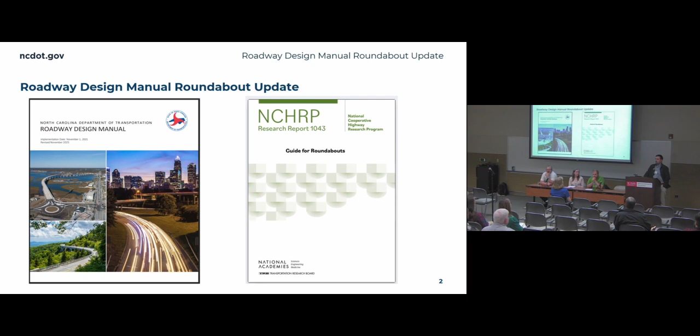So I'll give you guys a brief history of roundabout guidance in the state of North Carolina. It started out with NCHRP Report 672, which came out in 2010. We added a link to that, and that was essentially all of the roundabout guidance we did at that time. Then NCHRP Report 1043 came out in early 2023, and in November of 2023 we added a link to that, as well as a little bit of tailored guidance for North Carolina. That brings us to February of this year, where we have created our roundabout update.

The reason for this update is because we have had enough roundabouts in the state that we've faced a couple of reoccurring challenges. So we've taken some lessons learned from those projects, as well as national guidance and guidance from some other states, Florida being one of them. We've compiled all of that information into this update. So what was actually added?

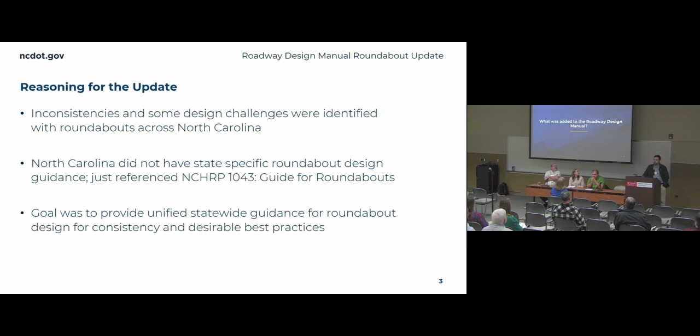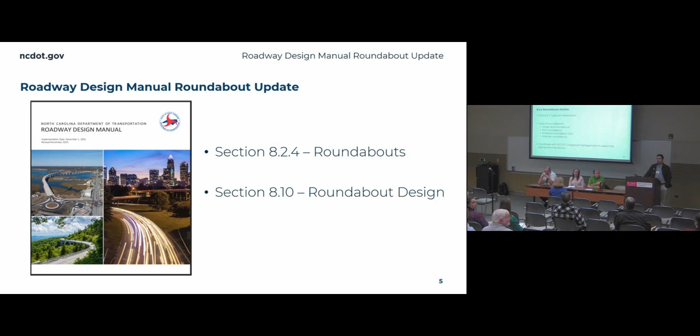We've added to 2 sections. The first section is an overview of roundabouts, and the second section gets into the design of roundabouts. For the first section, our overview, that is in 8.2, the types of intersections, and there are going to be 4 types of roundabouts that we discuss in that section.

The first one is single-lane roundabouts - that is the default roundabout you should consider. We then have mini roundabouts. A mini roundabout is a little bit smaller, and they're generally an upgrade from a 4-way stop. And then we have multi-lane roundabouts.

NCDOT is recommending 2x1 for our multi-lane roundabouts. You can do a 2x2 if you talk to congestion management, but we are highly discouraging it due to some of the issues we have had with them in the past. Finally, we have modular roundabouts. Modular roundabouts are quick and easy to put up, and very cheap. However, we have some concerns with the length of time that they will function.

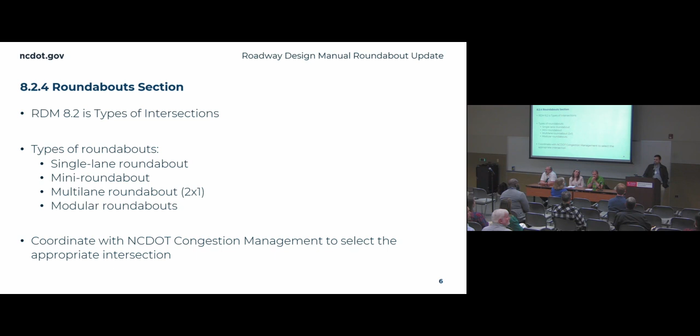So to get into 8.10, that is our design guidance. This section is going to be orienting designers. It is not going to be a one-stop shop. You are still going to use the NCHRP report, but this is going to give you an understanding of what we are looking for in North Carolina.

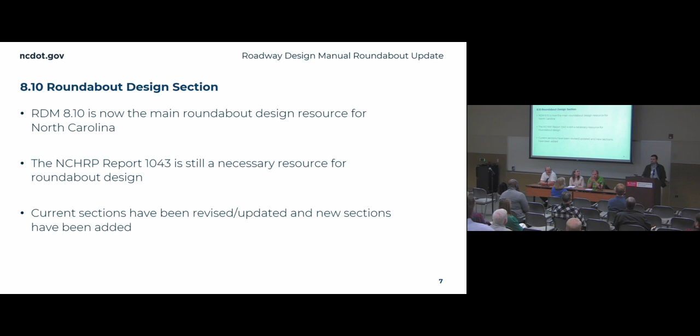The main thing it talks about is the roundabout design process. Roundabouts are very versatile, so you as a designer need to keep your objective for this location in mind. Some objectives listed here are speed control, pedestrian and bicycle accommodations, large design vehicles, high capacity, and right-of-way impacts. Think about your project location, your scope, your stakeholders, and what is important in that location. Pick the most important thing, and when you are designing your roundabout, keep that in mind.

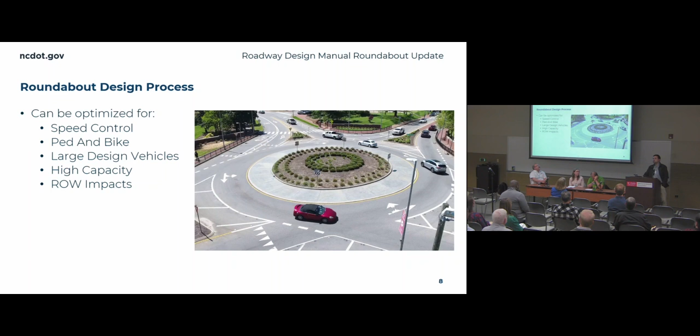Roundabouts can be optimized, but generally when you make a change, it will give you pros on one side and losses on the other. We want to make sure that we are considering our objective when we are weighing those two.

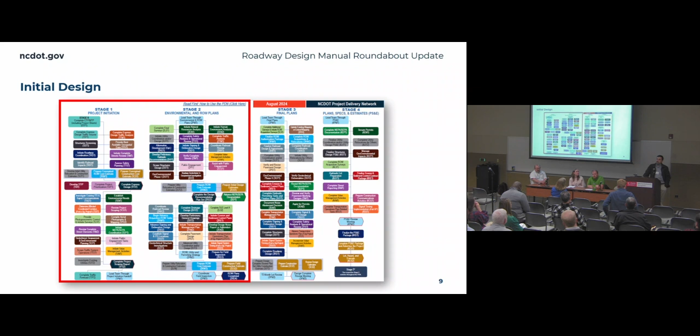During initial design, you need to consider six things. The first thing to consider is your alignments. You need to create horizontal and vertical alignments, as well as set the size and location of your roundabout circle. The location of your roundabout circle is something we want to emphasize.

This is something you should be intentional with. A lot of designers will put the center of their circle at the crossroads of their alignments, and we want to emphasize that if you move the location of that roundabout, you can get gains on some of your approach angles. Speaking of approach angles, for leg design, you have approach legs and departure legs.

For approach legs, our focus is slowing people down to the operating speed of the roundabout. As you can see here on that right side leg, that shows slowly decreasing radius curves. Then for the design of departure legs, we want to make sure that we are allowing people to accelerate out of our roundabouts.

Another thing that goes hand in hand with those two things is truck aprons. We're talking about external truck aprons here, and essentially we want to limit them for two reasons. The first is a pedestrian issue, which we will talk about later in the presentation, but they are also a large chunk of the cost for roundabouts. The final layout thing you will think about here is your bypass lanes.

Once you have your entire layout done, we can look at our fastest path calculations. For anybody who doesn't know what a fastest path calculation is, it is essentially the theoretical speed that you could travel through the roundabout. We want to make sure that all of these paths are similar in speed, but that's something Lily will get into a little bit more later on in the presentation.

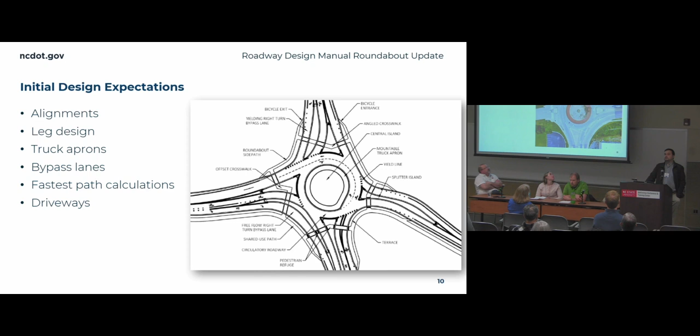The second and final stage we talk about is DRPS. If you look at this section, there are a lot of bullet points, and what you will see is a lot of things that say revise, confirm, and review. Essentially, this stage is iterating through previous designs.

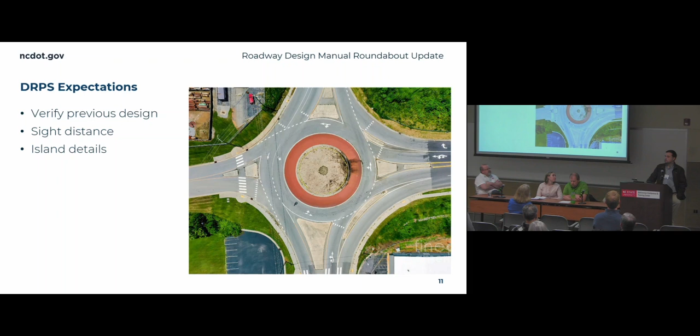Nobody's going to get a roundabout perfect on their first try. We want to emphasize that. You are going to have to make a lot of changes, a lot of adjustments, look at previous things, see what you can do, what changes can be made to improve your roundabout. There are two other things we're going to add at this stage: sight distance calculations, for both intersection and stopping sight, and island details.

So now we're going to talk a little bit about the typical section changes we have made. The thing I want to be very clear about on this slide is that this is a typical section, not a standard. We do not want to see 12, 18, and 10 used for all roundabouts. This is us sharing a starting point, but you should always get guidance and backup for the numbers you use on your projects.

The things I want to highlight here are changes to the truck apron, which is A1, changes to rolled curb, which is R2, and then changes to our pavement schedule, as well as changes to R3, which is our modified 2'6" curb and gutter.

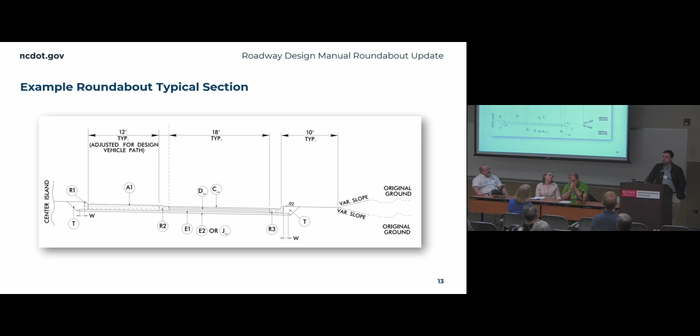2'6" curb and gutter is the standard for roundabouts. We want to recommend it on all of them. We believe curb and gutter has inherent speed control compared to shoulder and pavement markings—essentially, that vertical face of the curb is a much better enforcer than a line is. You do not, however, have to run curb and gutter over your entire project; it can be limited to the roundabout.

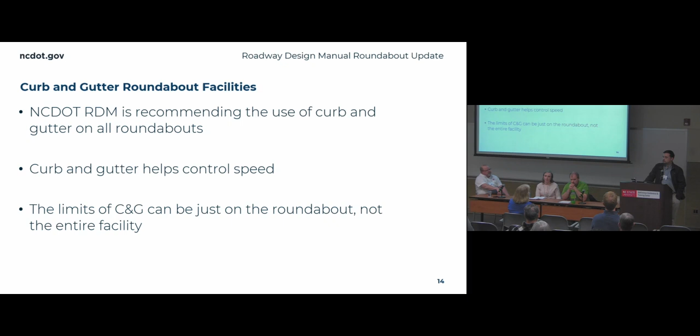The first typical section change we're going to talk about is the thickness of concrete truck aprons. That has been in the past anywhere from 7 to 12 inches, and we're using 12 inches as a standard moving forward. There have been issues with cracking of previous truck aprons, so we have increased that depth.

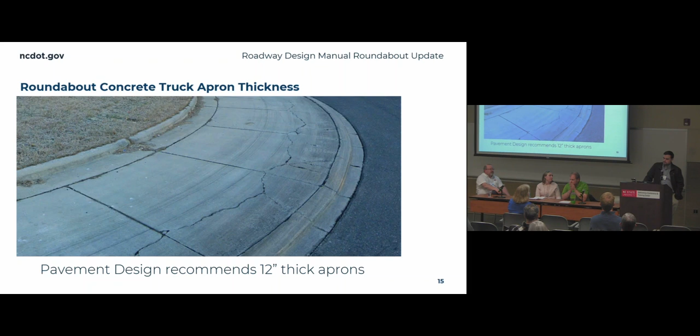The next change we have is rolled curb. Rolled curb is replacing 1'6" curb. That has sometimes been used on roundabouts, but we want to promote the use of rolled curb. Here we have two rolled curb standards: a 3-inch rolled curb and a 2-inch rolled curb. The 3-inch is standard, and the 2-inch is used whenever you have a high volume of low boys.

The benefits of this rolled curb is it provides a better, smoother transition from the circulatory roadway to the truck apron.

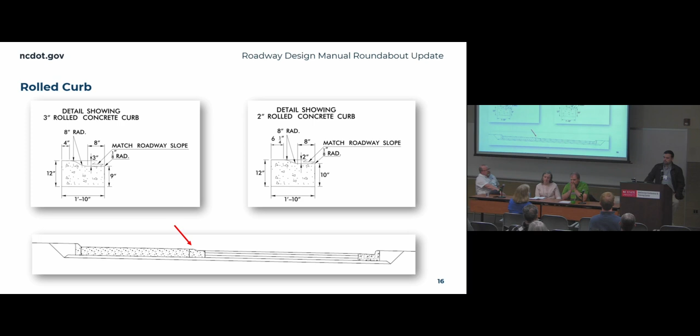Now, as you may have noticed, the faces of those rolled curbs were 9 inches and 10 inches, which is higher than the standard 7-inch face of our curbs, so we've had to make changes to our pavement schedules. The first change is those first layers, the orange, yellow, and red—3 layers of surface, intermediate, and then base, 3 inches each to sum up to 9 inches. That matches up to the face of those two curbs.

The other change we have made is that layer of base course on the bottom. The way this typical section is set up is that there's a continuous subgrade line under the entire section to make paving and grading easier.

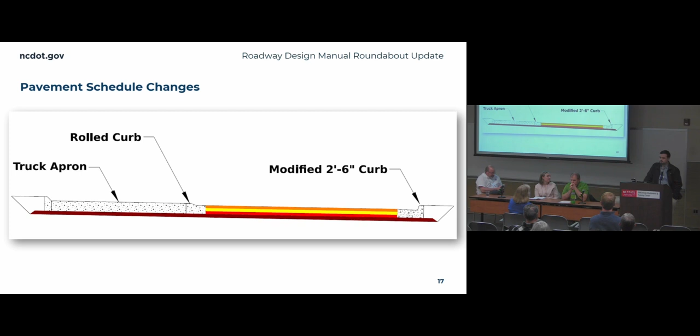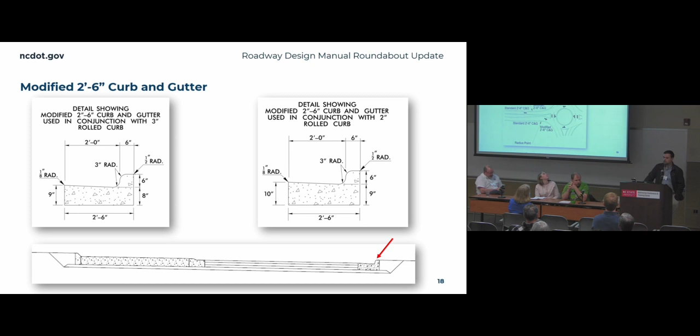So we don't want to see people running these over the entire length of a long corridor. You should limit these to just the roundabout—when I say these, I'm talking about the modified curbs as well as the pavement schedule. As far as where you make that transition, that's something you'll need to coordinate with the division and construction on, and a good time to do that is your field inspection meetings.

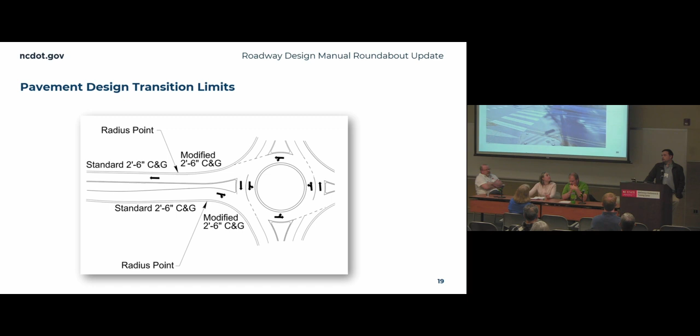The final typical section thing I will talk to you guys about is truck aprons. As I talked about previously, there are pedestrian issues here. The problem is a pedestrian waiting on the sidewalk doesn't understand that a truck apron is not a sidewalk. So if a person is waiting in that truck apron and a truck needs to use it, you have a conflict there. The easiest way to limit this conflict is to limit truck aprons as much as we can.

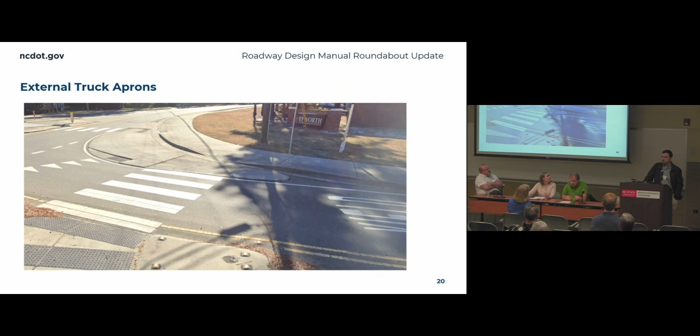What we've learned through developing this guidance is that designing a roundabout is a bit of an art. You're constantly trying to balance the core design principles: controlling speed, guiding vehicles clearly, promoting visibility, and accommodating large vehicles, then bringing all those elements together into one design that works well as a whole. For example, if you increase your entry radii, it may help truck turning movements, but it may also increase entering vehicles' operating speeds, which is less favorable for pedestrians. So you really have to consider the trade-offs of these design decisions.

We added some new subsections to the roadway design manual to help designers better understand these fundamental design principles. Those subsections cover the location and shape of a roundabout, vehicle capacity and lanes, speed control, speed consistency and fastest paths, entry angles and vehicle path alignment, and sight distance.

The designing for large vehicles section was given an overhaul. Some information that we felt was best covered by the NCHRP 1043 report was removed, and we added additional information regarding truck aprons based on feedback from pavement design and the divisions. There's also additional design guidance added on truck-heavy roundabouts.

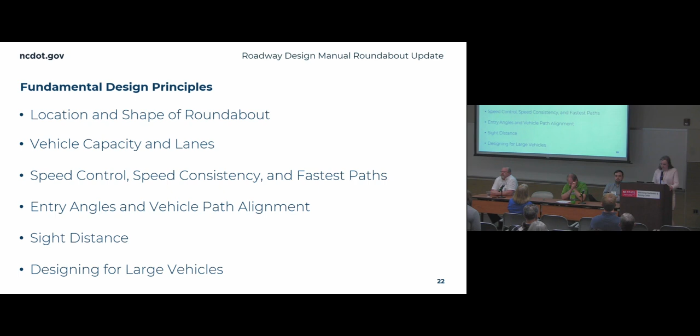When you begin the design of your roundabout, your first instinct can be to leave the circle right where the existing intersection is, as you can see on the left, to avoid property impacts, but that is not always the best option. In some cases, shifting that circle, like on the right, can help improve poor approach angles and ultimately improve how that intersection works.

Ideally, you want those legs to intersect the circle at as close to a perpendicular angle as possible. You can see here that the one shifted to the right does meet that better perpendicular angle. It usually takes some tweaking and iteration to get to the right circle location, but it really impacts the design, so it should be highly considered.

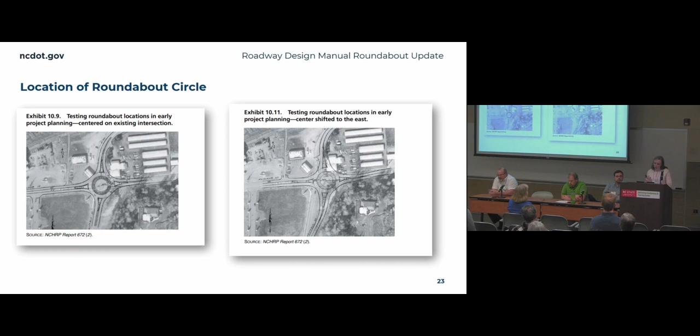For roundabouts on higher speed facilities, you want to slow that driver down before they actually get into the roundabout so they're able to go those slower intended speeds, 15 to 25 miles per hour, that a roundabout is intended for.

Unfortunately, posted speed reductions are not effective. Your geometry must provide that speed control. If a driver feels they are able to go higher than your desired speed, they will do it. That's why we added this figure to our guidance, based on examples from Wisconsin and Florida, as well as the AASHTO Method 2 super elevation tables.

Something else to keep in mind while discussing approach design is to ensure your splitter islands are not too long and too wide. They need to provide that speed control and accommodate pedestrians. However, minimizing them can help reduce your cost and footprint. So it's definitely another very important design consideration.

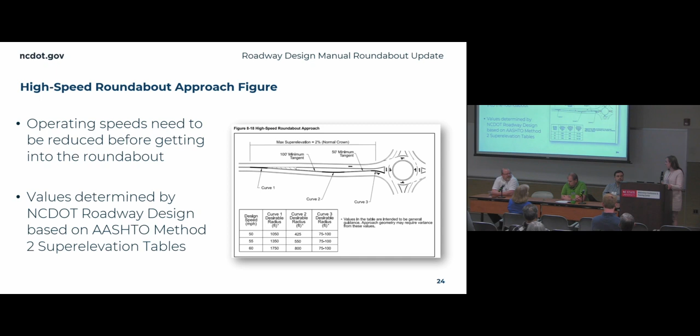Now let's go through an example with this high-speed approach figure. We're going to pretend that facility is set at a design speed of 50 miles per hour. For curve 1, I'll go with the values from the table and select 1,050 feet. Then after the 100-foot minimum tangent, I'll select 425 feet for the second curve, then a 50-foot minimum tangent and 100 feet. The point is that over time, those radii are progressively getting smaller, which reduces the driver's speed, which is our goal.

This methodology was included as a best practice. These are recommended values, and if your project and conditions dictate using something else, that is okay. This is also a tangent approach, so if you have a curved approach or other project conditions, those values may also vary.

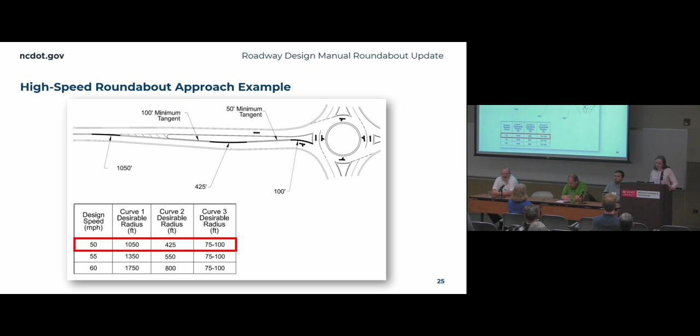This next slide illustrates a roundabout natural path, a term you may or may not have heard before. Ultimately, it's just the path the driver is going to be traveling throughout the roundabout based on how that intersection is actually laid out. This is critical because it's not just what the roundabout looks like on a plan set.

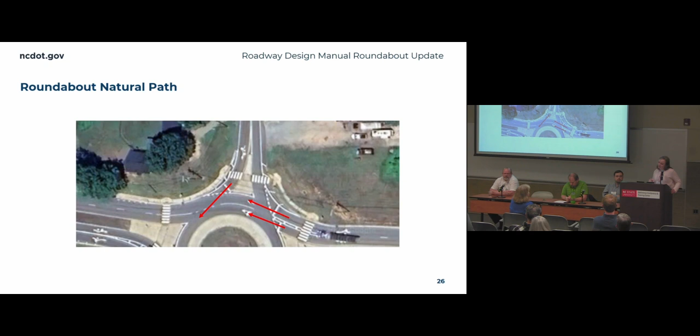That's going to be your real operating movements. It is helpful to lay out all of your vehicle swept path movements when designing the roundabout, so that you can envision yourself in the driver's seat and get that perspective. From there, you can begin adjusting the entry, the splitter islands, and the central island to improve tracking. This is particularly important for 2x1 roundabouts, as the driver needs additional time to select the correct lane choice.

Speaking of 2x1 roundabouts, here is a figure added to the Roadway Design Manual to help designers visualize the concept of spiraling within a 2x1 roundabout. In simple terms, the vehicle path shifts toward the outside so that drivers are already there when it's time to exit. This helps avoid conflict from vehicles changing lanes where it would not be desirable to do so.

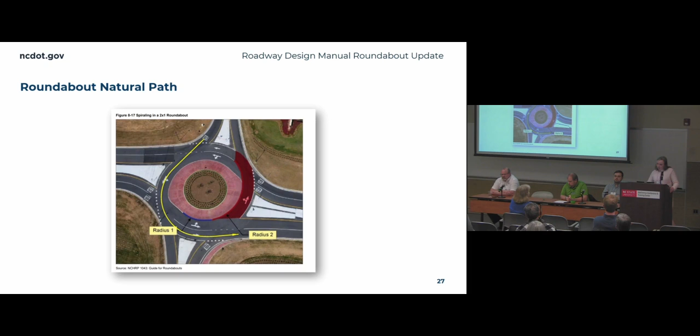Roundabouts have four different types of stopping sight distance checks to make sure drivers can see what they need to at different points and stop if necessary. NCHRP exhibits 912 through 916 dictate the limits of where these stopping sight distance checks should be calculated. These four types are for the approach, right turn bypass lanes, pedestrian crossings, and the circulatory roadway. We added references to these exhibits and sections so designers can quickly reference them when calculating this.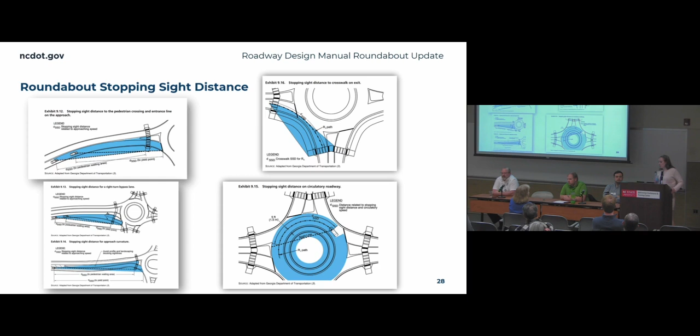Now let's talk about intersection sight distance checks, which are all covered in Exhibit 9.17 of the NCHRP report. Intersection sight distance needs to be calculated at the yield line as well as 50 feet before it, so that the driver is not seeing circulating traffic at the last second. We added a reference to this exhibit as well, along with some associated figures designers can reference, which will be available in our guidance.

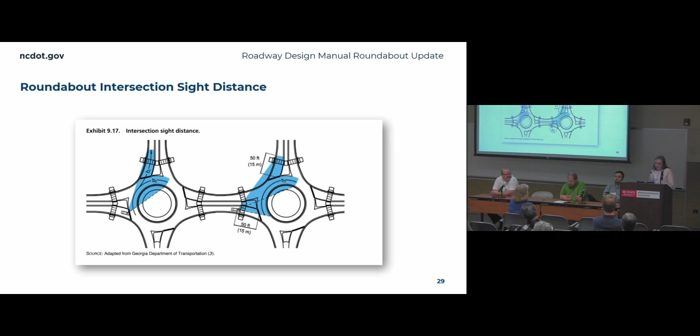Roundabouts can have a bypass lane with yield or merge geometry, as shown in this figure now in the Roadway Design Manual. The layout should match the condition you want to design, or want drivers to respond to, because that distinction is not always obvious in design.

If you want that bypass lane to function as a yield, it needs the same sightline considerations as a regular intersection, meaning the driver should easily be able to look to the left and tell when there is an acceptable gap to enter. On the other hand, if you want the bypass lane to act as a merge, it's critical that there is enough side-by-side parallel lane length for drivers to merge comfortably.

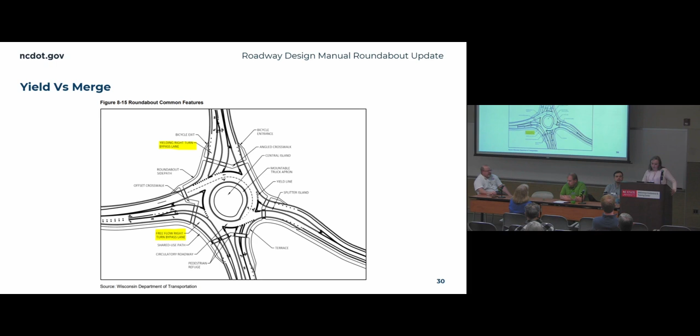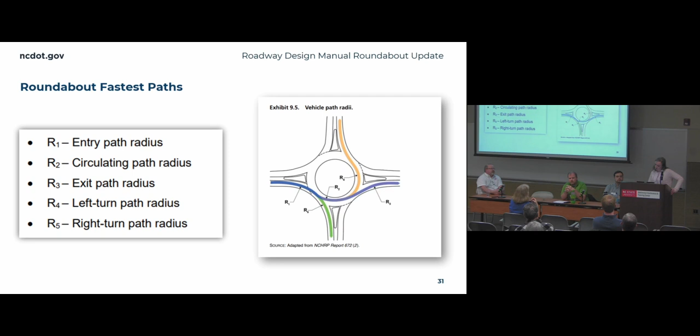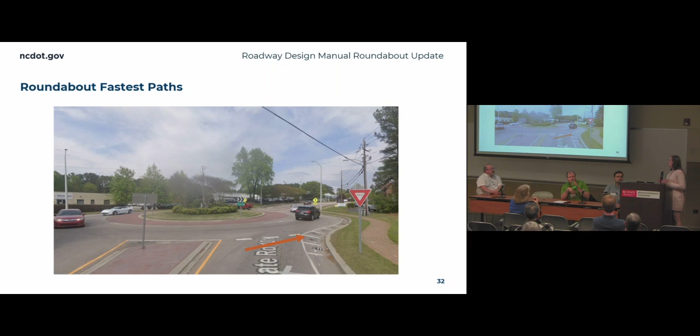Here's a location where delineators had to be added because the curbing was not providing sufficient deflection and cars were traveling too fast through this movement. This is why fastest path is critical—if done during design, these kinds of issues can be caught earlier and hopefully solved by geometry instead of mitigation.

The roundabout drainage guidance was updated to align with NCDOT hydraulic guidance. Since roundabouts are lower speed environments, spread and hydroplaning are not as big a concern, but the drainage still needs to work—you just don't want to over-design it either. A key point in the guidance is to keep the drainage structure outside of the vehicle path, especially on the inside of a roundabout. The better place for inlets is usually along the outside curb of the approach legs before drivers reach the yield line, which is a good place for coordination.

If you're a roadway designer and you do your geometry, and then you get your drainage back from hydro and see a box in the middle of the travelway, that gives you the opportunity to discuss with the hydro engineer. This doesn't mean anything was automatically wrong, or sometimes it just can't be avoided, but you can start those conversations and know that maybe that roadway geometry can be adjusted to get that box out of the road.

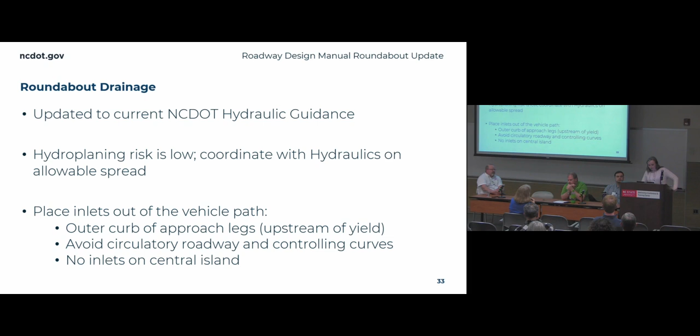This is standard drawing 815.02, subsurface drain for installation in grass medians and roundabouts, which was added to the 2024 standard drawings. It's used anytime you have drainage on a roundabout with a grass central island. The main benefit is to keep that center draining and not turn into a big muddy maintenance problem.

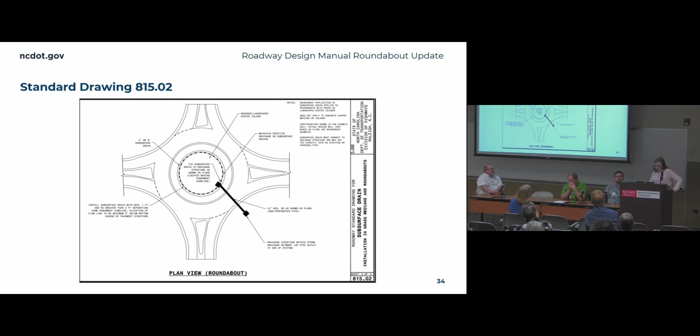Usually an interior truck apron is sufficient to accommodate trucks in a roundabout, but in higher truck locations, like an interchange with a nearby truck stop, exterior truck aprons may also be needed. This is something designers are running into more often as interchange roundabouts become more common. Truck aprons and geometry adjustments help make room for large vehicles while keeping the roundabout operating as intended. It's important to design specifically for whatever large vehicle is the design vehicle on your project, as they all have different swept paths and small design considerations that need to be factored in.

Back to exterior truck aprons, you want to be very intentional about where you're placing them, because too much exterior truck apron can be confused with a sidewalk. So it's always worth checking whether moving that roundabout circle can reduce where that apron is needed.

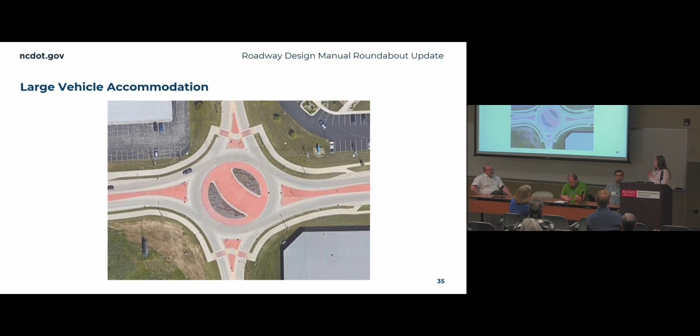The Roadway Design Manual is a living document that's updated typically every May and November, and in this case February. This was our first enhanced NCDOT roundabout guidance, and more updates, particularly to the roundabout guidance, are expected in May. If you have feedback, lessons learned, or experiences with roundabouts, please reach out to us and discuss this. We want to hear from you, the industry, and that would be helpful for us. We'll be reviewing all input submitted to us, and that input will be considered for future updates to the design manual.

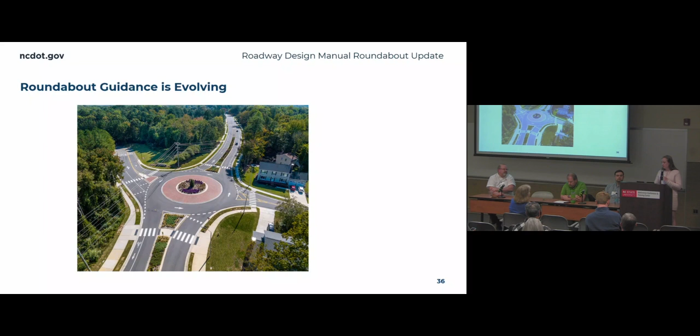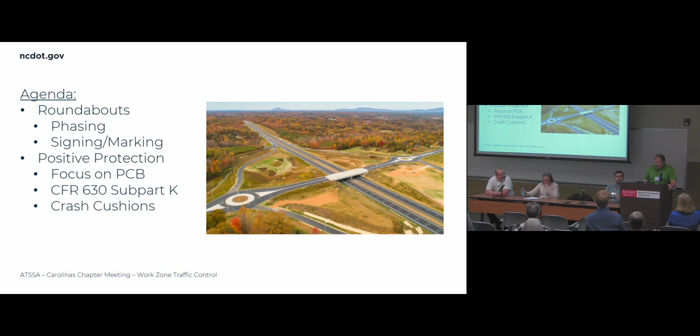I'm going to spend just a few minutes this afternoon talking about roundabouts and the phasing challenges we have during construction, and a little about signing and marking in those temporary conditions. Then I'm going to change gears and talk about positive protection. I'll focus on portable concrete barrier, but I'll also touch on some changes to the Code of Federal Regulations that were passed last year. And then I'll wrap it up with some information on crash cushions.

So I always put this slide in here. This means if you see a product that your company manufactures, it doesn't mean I like you any more or less. It just means that's the picture I have.

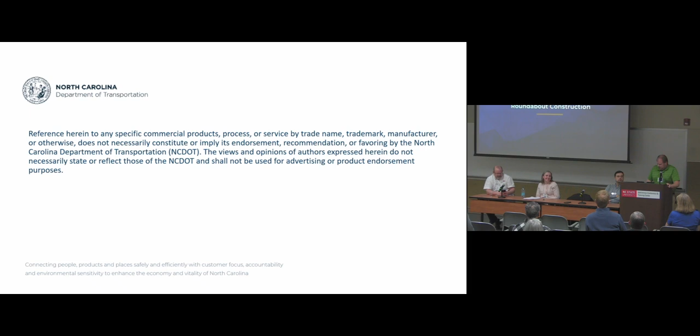So when it comes to roundabout construction, when we talk about roundabout traffic control, keeping the traffic moving is the name of the game. If we have the opportunity to close the roads and build the roundabout away from traffic, let's do it, we can get them knocked out fairly quickly. Unfortunately, most of the time that's not the case. We don't have the ability to close the roads, so we have to work really hard in traffic control to keep that traffic moving. One of the biggest challenges is that when we change an existing pattern to a new pattern, whether that's a roundabout, a diverging diamond, or channelization, proper signing and proper markings are very important, because we are changing the daily habits of folks who may have been using this intersection for decades.

Some of the other challenges we have are alignments, because when we construct something like a roundabout, a lot of times we have to shift traffic several times to get all the pieces constructed. Super elevations become a challenge too. It might be one direction existing and then has to change to the other direction at final completion, so during wedging we may end up with no super elevation, or a flat area, making it challenging for contractors to maintain positive drainage in those interim layers.

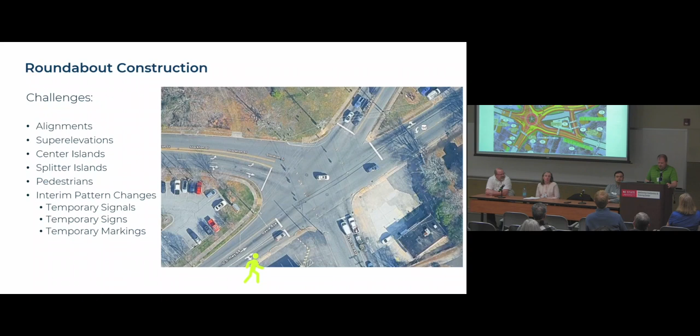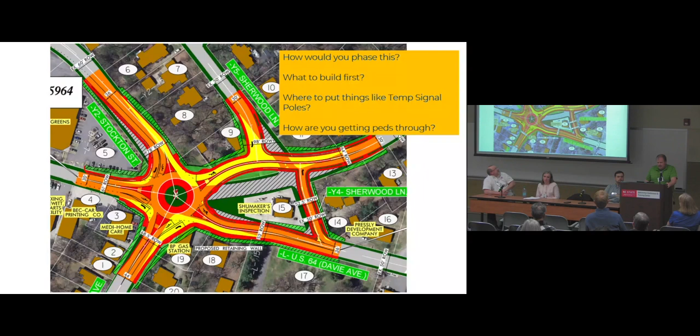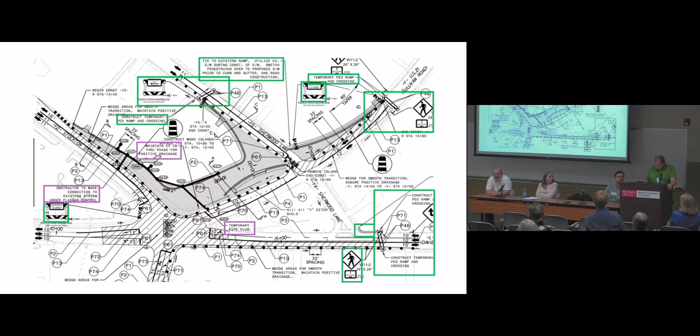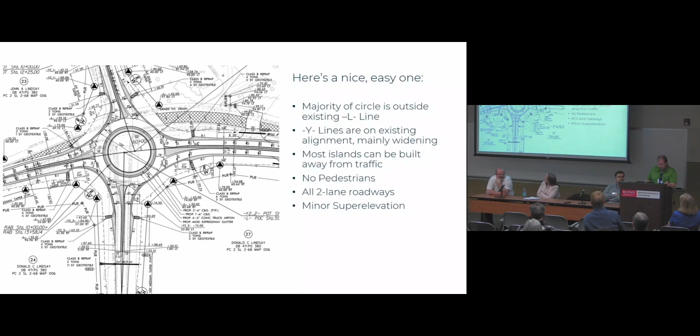I put this one in here as a nice easy example. As Lily and Ty were talking about, the center of that circle is outside of the intersection, so it looks like we can build most of it offline. The Y-lines don't look too complicated, no pedestrians, all two-lane roads, minor super elevation changes. Everything looks glorious—until we put up the profile, and it's three feet in the air for 500 feet on one of the Y-lines. A little bit of a challenge.

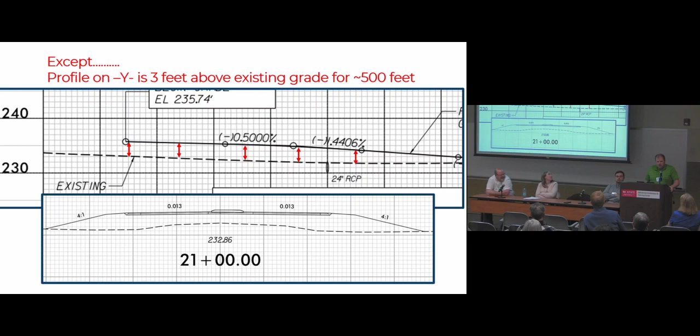It was determined there's no way to build that under traffic. We don't like to wedge three feet—it's very expensive, and it's very interesting when we come back later to work on a road and find four feet of pavement in there.

Are we sending traffic on any weight-restricted bridges, low-clearance bridges, railroad crossings? Are we going to increase turning movements at unsignalized intersections, or do we have to build temporary turn lanes at an off-site intersection to handle that traffic? What kind of signal timing changes do we need to do along the detour?

And then coordinating with our stakeholders. Have we told the school system? Does the school system have the ability to change bus routes? What about fire and EMS? What about just the local government, the garbage route, all of those things?

Once we get all that worked out, then we move into the more public communications, right? We got to let the public know ahead of time. Daycare, right? I always tell my staff, the afternoon rush hour is very important, because if you are not at daycare at 6 o'clock, it is like $25 a minute, right? So if we close this road and we didn't give public advance notice, and now they got to go a 10-minute detour, that is real money to somebody who is late picking up a kid from daycare.

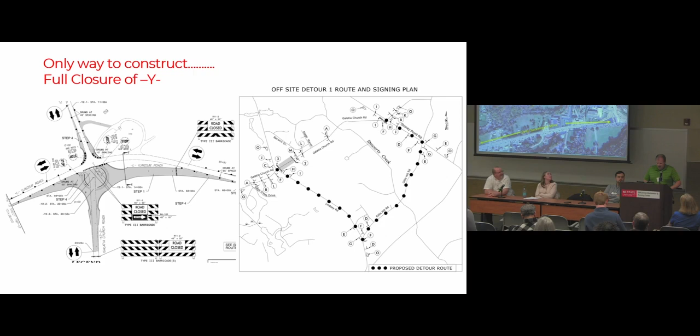A little bit more on roundabout construction. Sometimes we're working on multiple legs of the roundabout at the same time. Sometimes we can build half the circle. Sometimes we can't. Sometimes we can put traffic on one direction going around the circle. Sometimes we have to maintain a signalized intersection, but with reduced lanes.

So we have an example here where that's exactly what we had to do. We had to take 2 through lanes and reduce it down to 1 during construction. The day we did that, we caused 2 miles of queuing, and every single day after that, we continued to have 2 miles of queuing.

If we knew that going into the design, there are things that we can do, right? We can look at maybe some temporary widening. We can look at maybe going with narrower lanes. We can maybe look at putting intermediate contract times to encourage the contractor to limit the duration of this phase. So just a lot of those things that need to be considered when we go into constructing roundabouts.

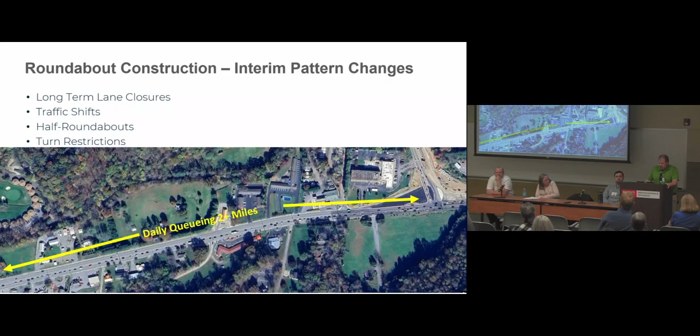I mentioned signings and markings. What we hear a lot of times is, oh, well, we don't need a temporary signing plan because we're just going to install the permanent signs. Well, the problem is that you don't have islands yet a lot of times. We've already gone and moved that pattern into that circulating movement, but we don't have splitter islands. We might not have a central island. And then, like I mentioned, this is a new pattern to folks, especially this one's in the western part of the state. They may not have ever seen a roundabout before. So it's very important that we get the signing installed, especially the regulatory signing, yield signs, one-way signs, stop signs, whatever the case may be for the condition.

And then same goes for the pavement markings, making sure that we're using the proper fishhook arrows and all that kind of stuff. We want to see that stuff on the temporary traffic control plan, because the permanent signing contractor is not coming out in phase 2 or 3 of the project, right? They are coming out at the very end to install all the permanent signs at one time. So if our temporary traffic control contractor needs to order some of these fishhook arrow signs, it needs to be in the plan so that way they know to fabricate it and get them delivered to the project.

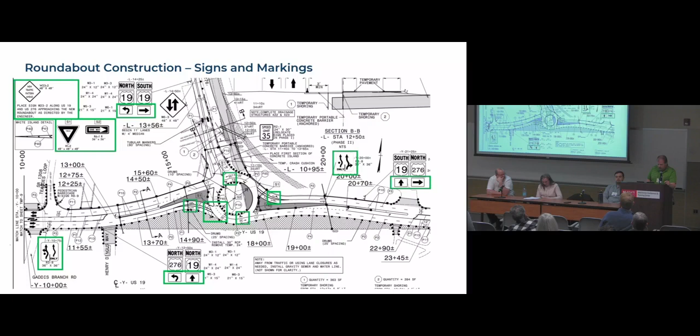So that's all I have on roundabouts. I'm going to shift over into positive protection now.

Positive protection, pretty straightforward. Basically, any device that redirects vehicles and is crash-worthy. It keeps our workers safe, it keeps our motorists safe.

A couple of definitions here, and I'll go over this a little bit more in a few minutes, but North Carolina DOT, we consider high anticipated operating speed at 45 miles per hour. That's basically the difference between test level 2 and 3. That is also the point at which 50% of pedestrians are not likely to survive if they get struck.

And then the last one there, no means of escape. Basically, as a department, we have to formally define what no means of escape is. So we made a fairly generic phrase there. Basically, if your workers do not have an unimpeded way to escape the path of an errant vehicle, then that means that they have no means of escape.

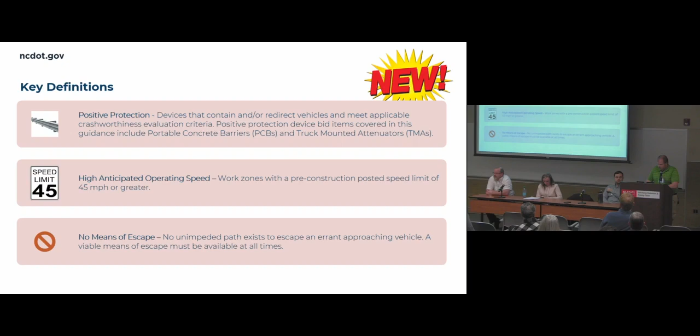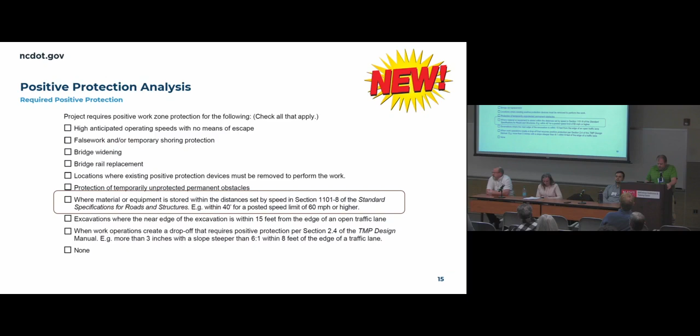So there's a lot of information out there. We have some barrier design guidelines, some positive protection analysis stuff that can help designers get through that design analysis. But let's see, I'm going to skip ahead a few because my presentation this morning had the slides in a different order.

A lot of what's driving some of these new slides is a change to the Code of Federal Regulations, which went into effect last year, and it's a phased implementation. The highlighted things here, as I mentioned, we are required to define high anticipated operating speed, which is 45 in North Carolina, no means of escape, meaning workers don't have a way to run away, and then we also have to formally identify engineering study.

This Code of Federal Regulations, I think, caused a lot of folks to get nervous because it says three things: if the project has federal aid, and if there's high anticipated operating speeds, and if the workers have no means of escape, then you shall use positive protection to protect those workers. If, for whatever reason, you cannot, then you shall do an engineering study to eliminate the positive protection. So what does all of that mean?

Does it mean we're going to have positive protection everywhere? No. What we anticipate is that it will not change our day-to-day stuff. There are no projects in the state that I'm aware of that this new requirement changes what we have been doing. What it does change is those 2 or 3 projects a year where we might not have positive protection, rather than just sealing a plan sheet without having it. Now we just have to do a little bit more documentation.

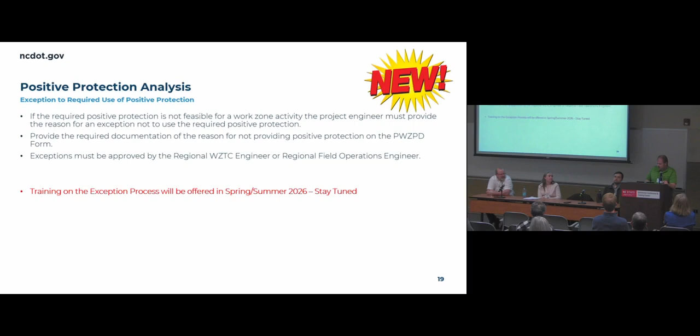So what I'm going to do is back up a little bit to where we were. Positive protection - obviously we're going to use it as much as we need to, right? The benefit is that positive protection, if somebody strikes it, becomes somewhat of a controlled collision. It reduces the severity of crashes, but we still want to manage the risks. Positive protection increases crash frequency.

When we put 70 miles of concrete barrier on I-95, crash numbers are going to go up. Right now, those crashes are less severe than if they run off into a ditch or an open grade or a culvert that's under construction, but the crash frequency is going to increase. It also increases the response time to crashes and the probability of secondary crashes. It also causes drainage and sight distance concerns, potential issues with oversized loads, and construction access for our contractors.

And then there's the tremendous amount of worker exposure required to install and remove it, especially if it's anchored concrete barrier, right? That means we actually have to have guys standing on the side of the road, drilling holes into the pavement and dropping pins in this barrier for miles. And then when it comes time to pick it up, they got to go out there and pick all those pins out again.

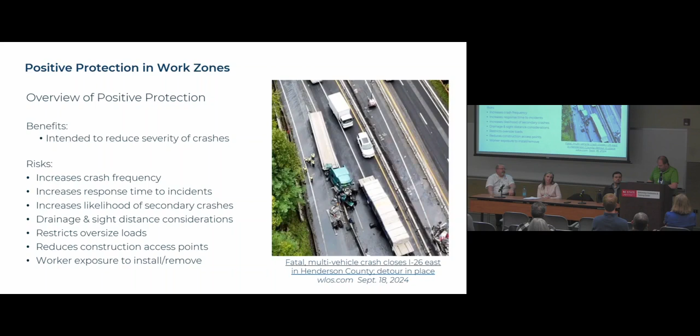So a couple of things I like to remind folks: every single time we use positive protection, whether it's portable concrete barrier, water-filled barrier, or guardrail, these things have the ability to injure people, and that's why we require all barrier installations to be signed and sealed. But ultimately, the goal is to just minimize the use, right? Get the work away from the traffic or get the traffic away from the work. If we can close it and build it away from traffic, that's what we want to do.

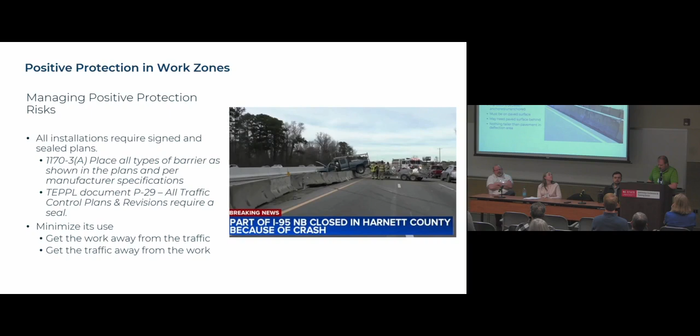All right, so getting into the types of positive protection - concrete barrier, right? That's tried and true, everybody knows it, we use it everywhere. But the big thing here is NCHRP 350 versus MASH 16. That basically means that in the 2021 timeframe, we switched to MASH 16 barrier, but contractors can still use their old barrier. This means a couple of things for designers.

One, we have to design as if it's MASH 16 - it's a little bit stricter design criteria. Because the problem is we don't know what the contractor is going to show up with, right? It's one pay item, they can bring either one. They might bring 350 for the left side of the road and MASH for the right side of the road, and that's perfectly fine. They're allowed to do that because if we just required MASH, there's not enough on the planet right now to meet our needs. They can only manufacture a couple hundred feet of this stuff a day, so we have to let them grandfather in that old barrier.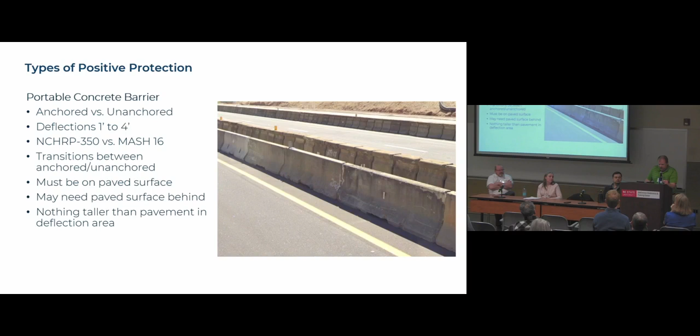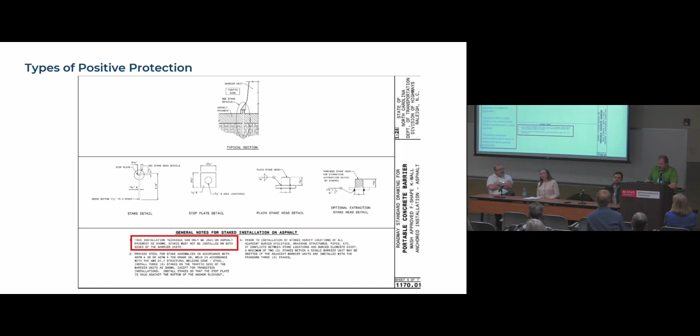Another change: the MASH 16 barrier has to be anchored on the ends. So when you come off of a temporary crash cushion, those first few pieces of concrete barrier need to be anchored into the pavement. That became a bit of an issue because it's how do you pay for it? If we're not using any anchored barrier anywhere on the project, how do we pay the contractor to go out there and drill these holes? The easy answer is just give them a pay item for a transition. But then the problem is that if they use the 350 barrier, that barrier does not need to be anchored on the ends.

Basically what we did is we developed a standard special provision that gets put into contracts. When we are transitioning from a crash cushion to unanchored barrier, that transition is incidental and the contractor does not get paid. If we are transitioning between anchored barrier and unanchored barrier, for example you have unanchored barrier running down the shoulder and you're getting ready to go underneath or over a bridge and need to anchor it for that 100 feet, we need to transition into that and then transition back out of it. This special provision says those transitions count as anchored length, so the contractor will get paid for them. That was somewhat negotiated with the AGC and CAPA, so it kind of becomes a wash for them.

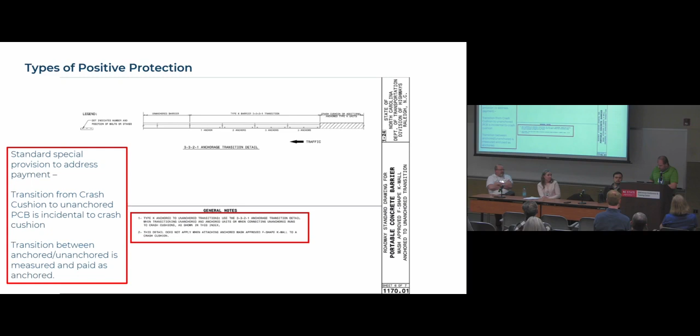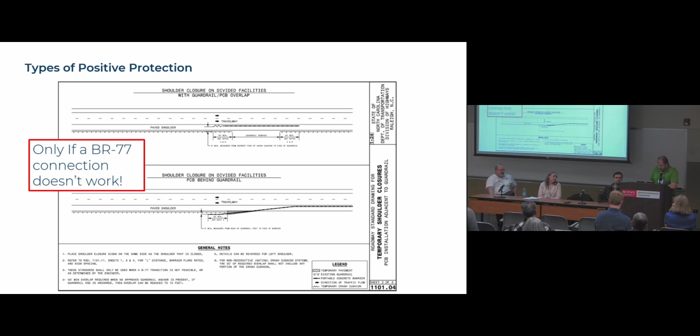All right, temporary crash cushions. If anybody is checking their emails today, you may have gotten an email from me this morning. Effective with May turn-in, so that's like 45 days from now, we now have to call out when gating or non-gating units are used.

Just real quick, a gating crash cushion, most of them, are water-filled. So you see a big bright yellow water-filled crash cushion on the end of a concrete barrier - that is a gating unit. That means if a vehicle strikes it on an angle, there's a chance the vehicle may penetrate through it and end up behind the barrier. That is okay, that is the way it's designed and intended.

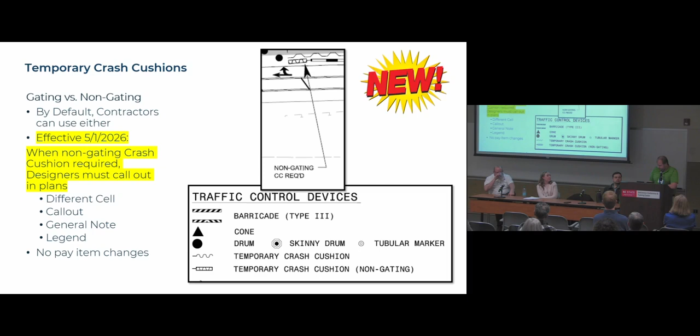Just two more real quick. Water-filled barrier. Every time I see it on a plan sheet, every time any of my staff see it on the plan sheet, they think it's like winning the golden ticket for Willy Wonka. They immediately run and show it to me on my desk because the note at the bottom really says it.

If you, as a designer, can make water-filled barrier work, then you can make concrete barrier work. Because the problem with water-filled barrier that most people don't realize is the minimum length is longer than concrete barrier. The deflection is 3 times higher than concrete barrier, and the end units are almost always gating.

So the message we try to send is yes, it has applications. It is more applicable as a channelizing device. They work great actually when we go to change things like diverging diamonds, when those curbs are not in yet. We can get nice solid channelization. But as far as a redirective barrier, it's not—99% of the time, it's not the right answer.

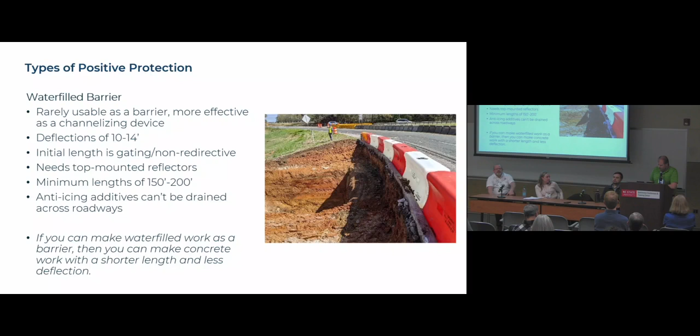Likewise, the last one we hear a lot about lately is steel barrier. I get asked a lot whether we're ever going to standardize steel barrier, put it in specs or standard drawings. The answer to that is probably not. The reason is because all the designs are proprietary and they're all different. Every single manufacturer of these products has a different set of rules on how to install it. They have different widths, different deflections, so there's not really any way for us to standardize a design for that.

Contractors love it—you can fit several hundred feet on one truck. The salesmen say you can install it much faster, but it seems to go much slower every time I've seen it. It is much lighter though, and the shipping costs are tremendously reduced. So if a contractor wants to use it, we will look at it every single time, and I'd say 7 out of 10 times it's okay—we will allow that swap. But unfortunately, it is not a one-for-one swap, so we do have to look at it every single time.

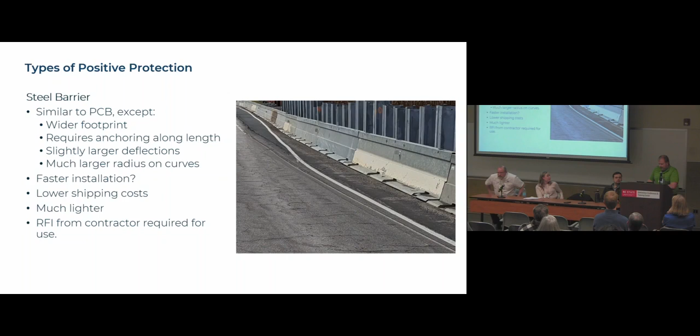That's all that I have. Appreciate the time this afternoon, and I guess we'll open it up to questions.

Just a couple questions. First of all, great presentation. Thank you. Great presentation, everybody. Just loved every second of it.

My first question is, is there a recommended maximum traffic volume for each approved roundabout type? I think it's 25,000 all approach vehicles from all approaches for a single lane, and right now a mini is 18,000—that's all approach, adding all the legs approaching the roundabout.

Is there any opposition to truck aprons at sidewalks, or at the roundabout being paint striped for pedestrian awareness and safety—in addition to the truck apron? Because I know when it gets close to the sidewalk, pedestrians don't always know, as Lily mentioned, that it's not actually sidewalk. We haven't seen a lot of them, but there are a few installations. I think that's a coordination effort with pavement marking, with roadway—it's case by case right now. We're pretty early in trying to get our specific guidance out there, and that's what we'll be asking folks to help us with as we learn more about operations and the craft of roundabout design.